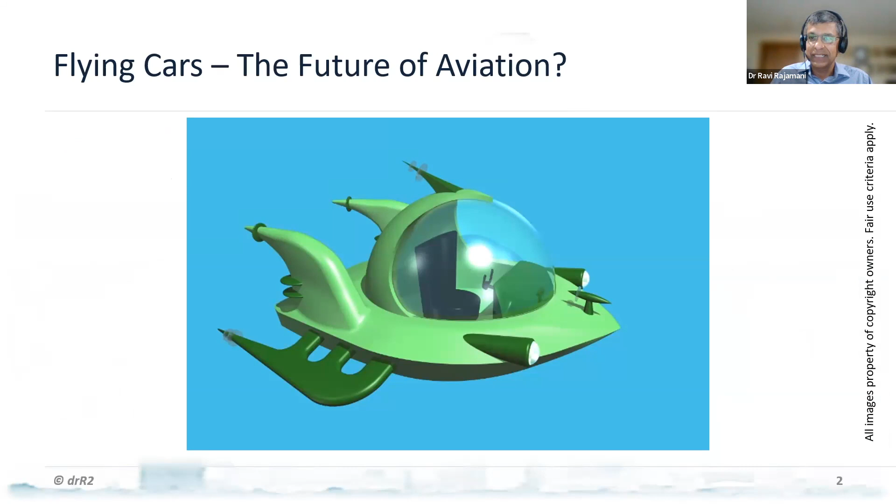Okay, I'm going to talk about electric propulsion and give you a brief history of it, and some of its technical challenges. More than anything else, I don't know if you have seen the Jetsons - it's obviously an American cartoon from way back when, and they had this personal flying machine for everybody there. I don't know how they did the propulsion there, but there are people within America and elsewhere too who have been trying to figure this thing out.

Let me show you a little video.

So this is what people have been working on at one end of the spectrum. I'm only talking manned flight today. I'm not talking about drones, electric drones. There have been many such vehicles being developed all over the world, including in India.

Manned is a little different. There have been some jetpacks. I know you've seen the ones, the French people in Dubai, and they've been trying that. Unfortunately, the lead pilot got killed a couple of years ago. So there have been some accidents, including with electric aircraft propulsion in China. There have been some real bad accidents.

However, within manned flight, at one end you have personal aircraft, and at the other end you have companies like Archer and Joby and Lilium, etc., that are developing, I'm sorry, they're developing passenger-oriented electric aircraft. So I got this recently.

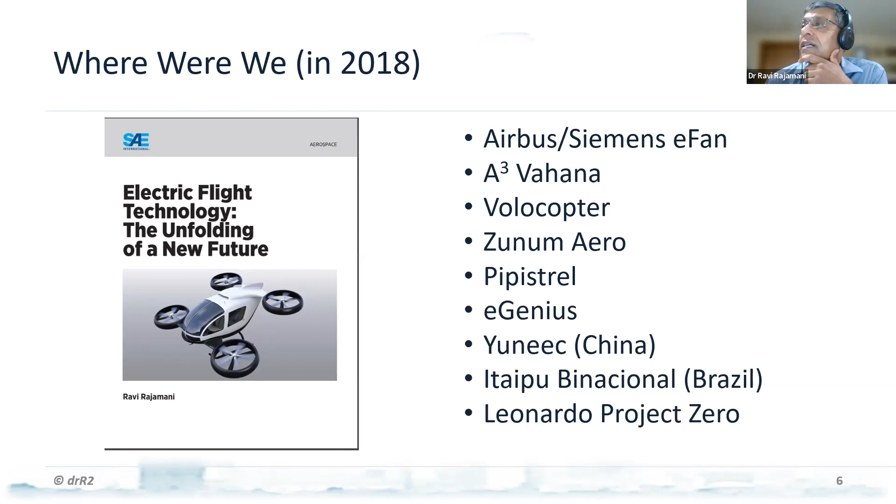There was a company called Itaipu Binacional in Brazil that was developing an electric aircraft, and then Leonardo, which was AgustaWestland, had a project of essentially a helicopter powered by electricity. Today, I believe only Volocopter and Pipistrel are left in that lot. Now, clearly Airbus is doing other things, and Zunum has gone out of business.

Leonardo has teamed up with another company, I believe, to work on something. However, a lot of the programs we saw 5-6 years back have gone by the wayside.

Why is this a problem? There are many hurdles to the adoption of electric propulsion. The aerospace industry is very mature in one way. It's extremely risk averse. It's very safety conscious. So system certification is a big deal for us.

And electric propulsion brings in many new technologies, especially related to energy storage, reserve energy, the kind of control surfaces, the way you do the controls, etc., which brings up many technical issues. And that's one of the reasons why it is kind of tough.

Also, a lot of these aircraft are transitional aircraft. In other words, they go from vertical flight to horizontal flight using propulsion systems that change their configuration. And that requires not only certification, but it also brings up operator certification problems. There aren't civilian pilots who know how to fly these kinds of hybrid aircraft. So the FAA is struggling with trying to get operator certification.

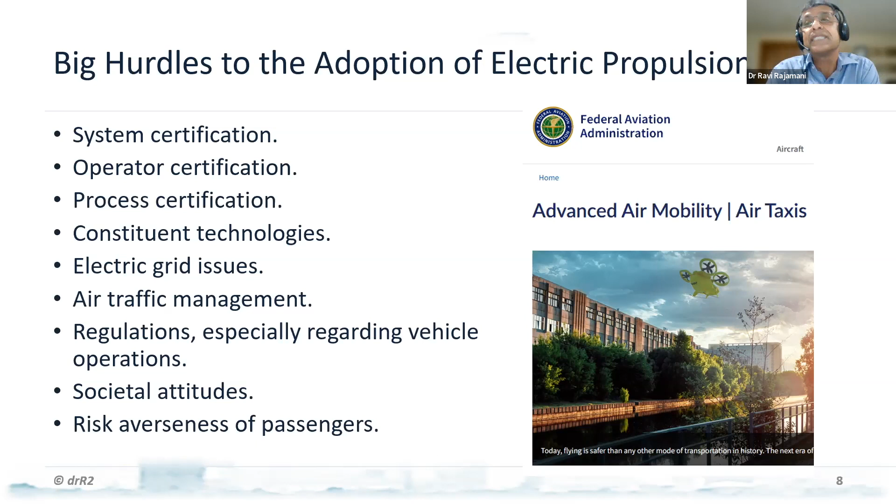And risk averseness of passengers as well. Do you really want to get into an aircraft which is so newfangled and technologically advanced? That's a question that I guess each one of us has to answer for ourselves. Well, when did it all start? Electric propulsion. Does anybody have a clue? I know this is not a question and answer kind of a thing, so I'll just bang right on to it.

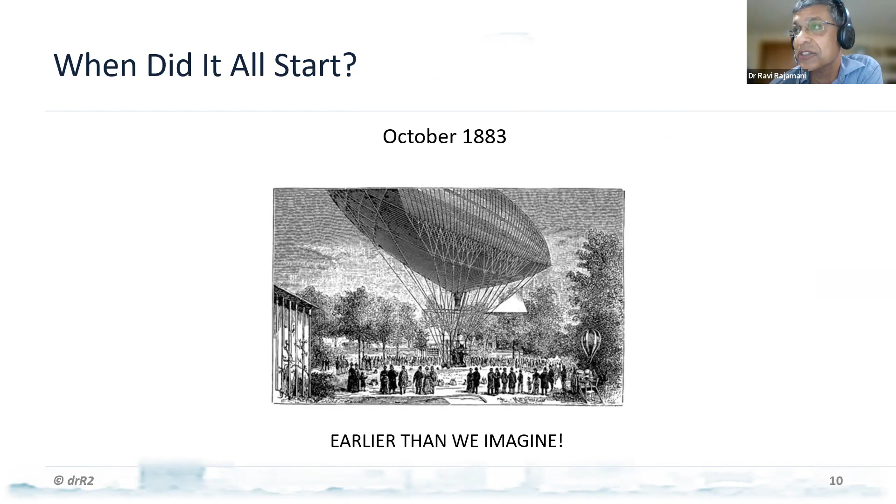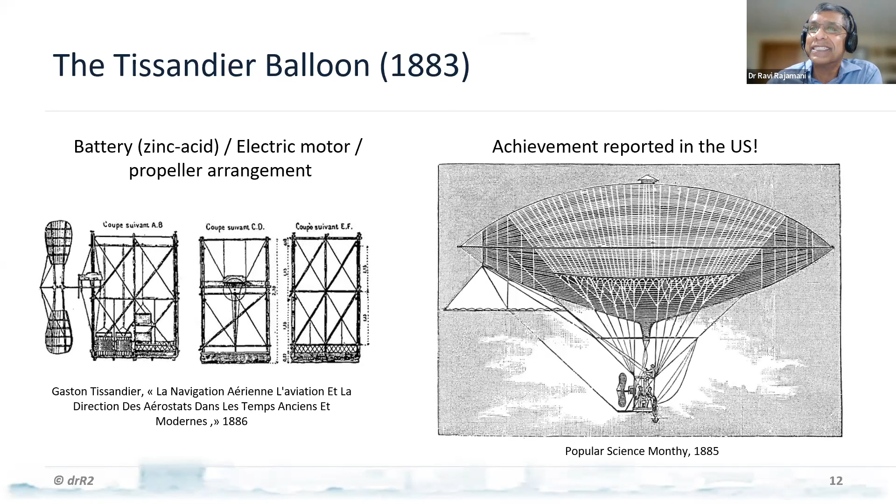You won't believe it. 1883 is when the first aircraft with electric propulsion actually got off the ground. Of course, it got off the ground because it was lighter than air, but still, the point is that it had many of the elements that we see today in an all-electric aircraft. It had a battery, it had an electric motor, believe it or not, by Siemens. Siemens was there since that time. And it had a propeller designed by these brothers who flew this right outside Paris in 1883. It was reported in the US about 2 years later. They didn't have internet then.

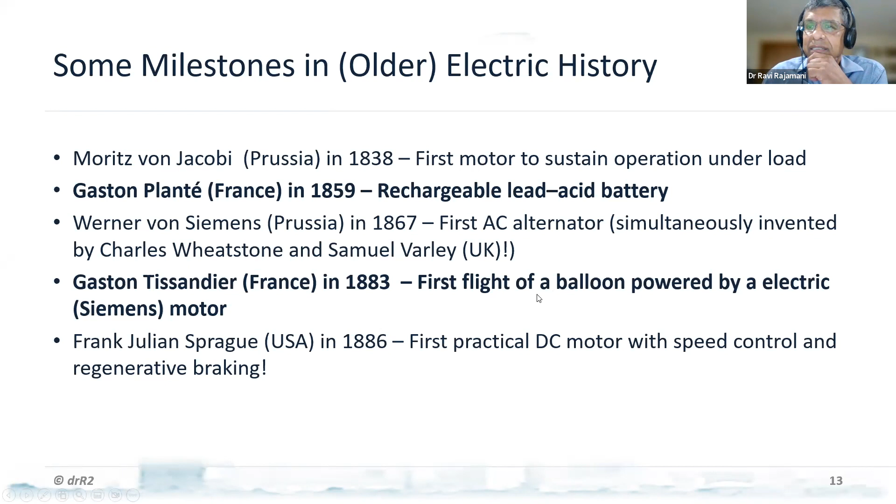Some of the key milestones in electric history, I don't want to belabor this too much, but rechargeable lead acid battery, 1859. There was Siemens, 1867, first AC alternator. And then you had obviously the motors themselves, which were used in this flight. So these things are fairly old. That was the only point I was trying to make. However, that was lighter than air.

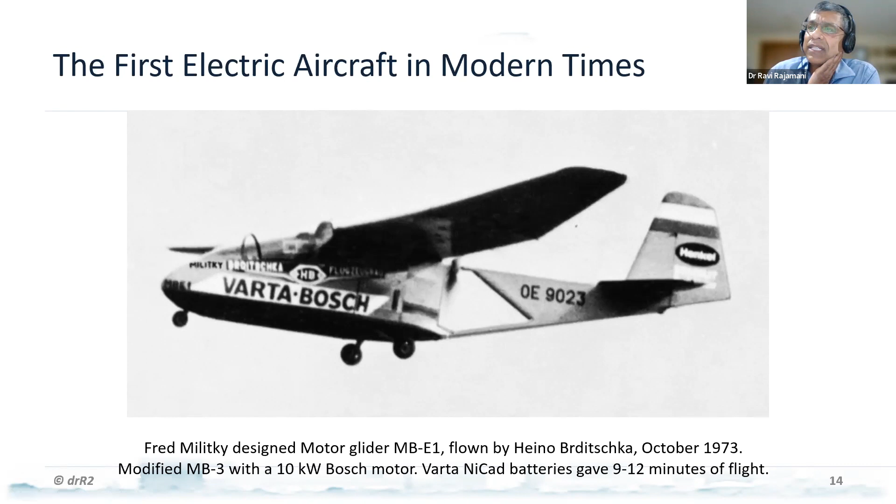When was the first electric aircraft in modern time? That was in 1973, interestingly, also in October. This was a modified glider, what they call a motor glider, in Vienna, in Austria. And this, believe it or not, thanks to YouTube, is a recording of the very first flight. It's amazing what you can get on YouTube these days. It's about 30 seconds. We'll just watch this.

As you can see, it's a pusher prop. They essentially took the IC engine and replaced it with a motor and batteries. I think it was like 9 minutes or 12 minutes total flight time. And this was right outside Vienna, the airport called Wels. And that was the very first heavier than air electric flight which was recorded.

Okay, then, believe it or not, after '73, a lot of time was, I wouldn't say wasted, but at least diverted from actual battery-powered all-electric aircraft to solar. Not that solar itself can do much. I've done some calculations, and solar really is not particularly good for flight, except for some novel things like the Solar Impulse, which took a couple of people around the world.

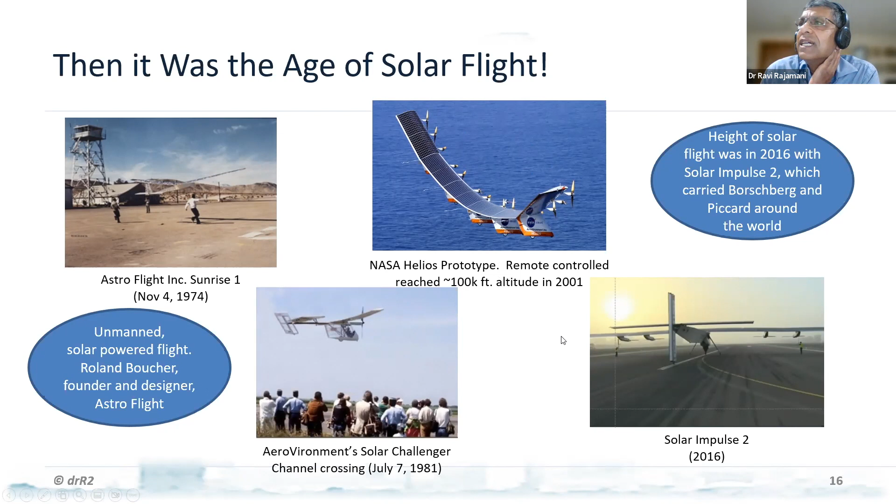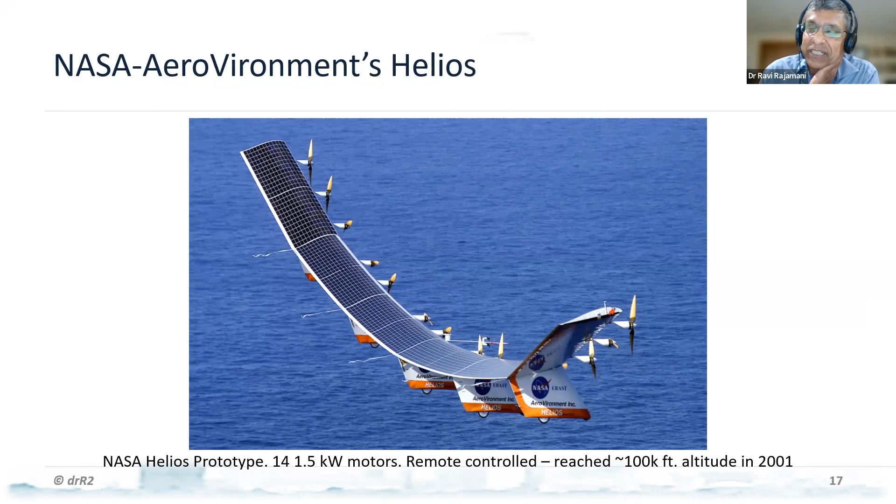And this is a very interesting aircraft, the NASA Helios prototype. The only reason I highlight it here is because it is essentially just a flying wing. It is a huge, massive wing made of solar cells, which powered these 14 tiny motors, and it reached a height of 100,000 feet. 100,000 feet has been in the news lately because of this Chinese balloon that was shot down in America last month.

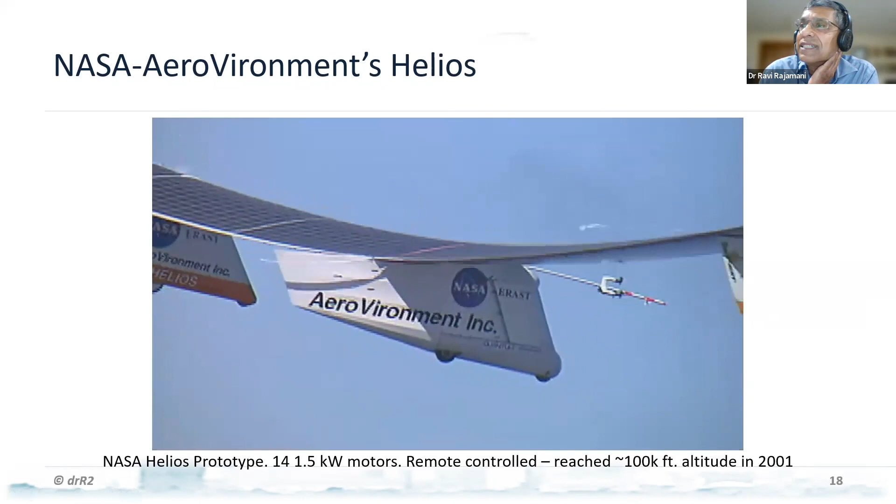So here is a small clip of this thing taking its test flight over Hawaii. This was in 2001, I believe, 2003.

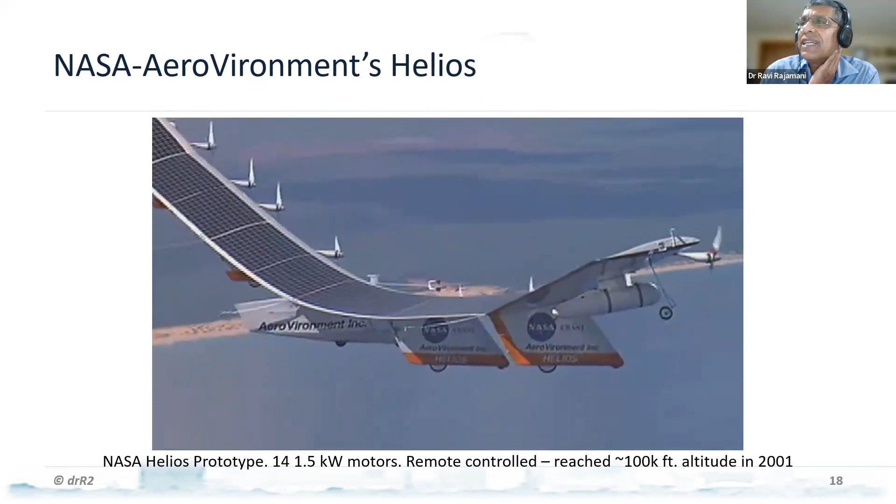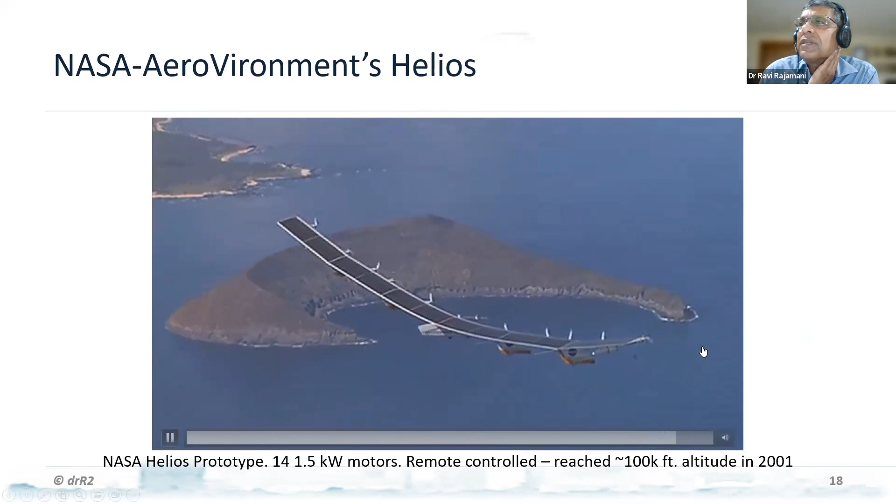I'm sorry, this was in 2003. And we'll just wait for this to end, which is now. And then, unfortunately, what happened was right after this flight in end of June, it crashed, somewhere around Hawaii. So that was rather sad, but it reached 100,000 feet, which is not something that normal aircraft do.

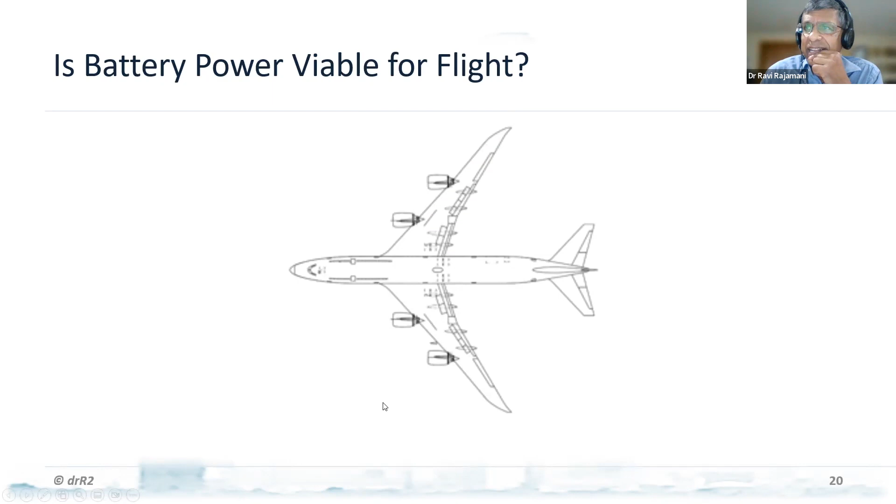Is battery power? So the question then is, solar is certainly not something that is viable for any serious air travel. It's fine for reconnaissance, which is what the Helios was supposed to be. Reconnaissance aircraft, something that can stay up in the air forever, basically. So solar is out. Is battery power viable for flight, a serious flight? Let's do a little calculation.

If you take a Boeing 747, it has 4 turbofans. I've just made some back of the envelope calculations. I may be off by a little, but it's not by too much. So a total of, let's say, about 100 megawatts to take off and climb. If I make a calculation for a 30-minute flight, the amount of energy that's needed, taking the best batteries today of about 220 watt-hour per kilogram as the specific energy.

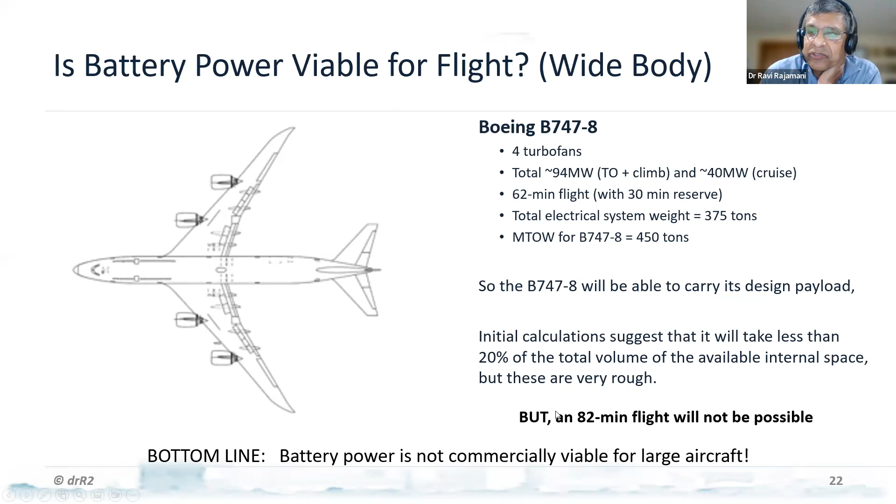If I look at that, a 62-minute flight with a 30-minute reserve, a 747 will be able to do it. And in fact, the electric system will pretty much take up the entire takeoff weight of this aircraft, which essentially means that it won't have any leeway in terms of weight for any people, any payload at all. An 82-minute flight will not be possible. Battery power essentially is not commercially viable. If I take this entire big 747 and all I can carry are probably a few tons, it's not worth it.

If I do the same thing for a narrow body, I could probably do a 70-minute flight with no extra payload, but anything above that is out of the question. Again, these are my back of the envelope calculations. You can certainly argue with these and come up with your own. But the point I'm trying to make is battery power is not commercially viable for a large aircraft. It is fine for small aircraft, Part 23 aircraft, but not for a large aircraft.

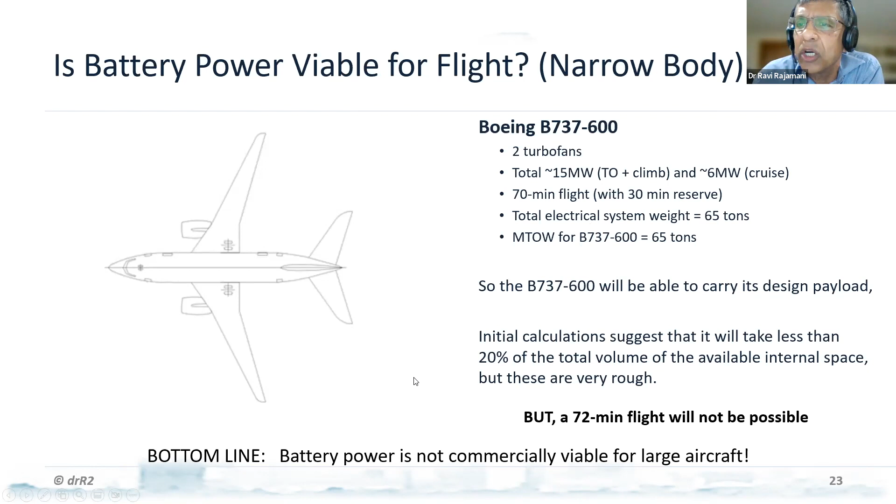So what is, I guess, possible with today's technology? All electric battery power flight, far fewer than 10 passengers, in my opinion, maybe about 100 kilometers. There are claims, let's say by Lilium, that they can go 400 to 600 kilometers. I have to see it to believe it. Maybe about half an hour, because the FAA requires half an hour of reserve fuel for emergency.

Hydrogen fuel, that's a really interesting prospect. There are things going on in that area, which I'll talk a little more about. That, I believe, can carry more. There have been some tests recently that seem to suggest that you can do better with fuel cell and hydrogen, but there are all kinds of other problems with hydrogen. We'll go into that. But hybrid electric was what I thought would be much better. But one of the companies that had a good idea, which was Zunum in Seattle, went belly up recently.

So it's interesting. Performance is more efficient than conventional because of the sizing issues. In other words, you can make the gas turbine that actually drives the generator much smaller and much faster, and you can get more efficiencies that way. Other than that, there are no braking efficiencies, no coasting efficiency, nothing like that in the air. So the Boeing 787 claims a 3% higher efficiency using more electric components.

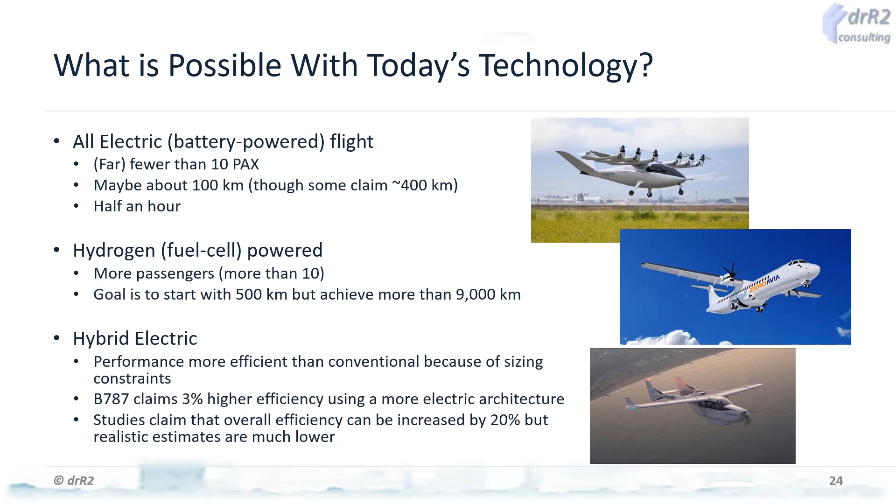Okay, so where are the technologies today and where do they need to be? The motors and generators: today, our specific power densities are in the range of 5 kilowatts per kilogram. There have been certain announcements from Siemens about closer to 10 kilowatts per kilogram. MagniX is, I think, in that range too. According to some calculations, especially from NASA Glenn Research Center, they did some studies. They have an entire big lab in Sandusky called NEAT, which is testing out all these technologies. They claim that 13 kilowatts per kilogram and above is needed for viable electric flight.

Power electronics: we are around 13 kilowatts per kilogram densities, and we need something greater than 25. Ohio State and others have claimed that they can get there. Virginia Tech in the US is working on this as well.

I'm now drawing a blank on the famous university in the UK that's also very, very good at this. Sheffield? I don't know, maybe one of you knows. And they also claim that they have technologies at that range, 25 and above. So we're getting there. The biggest problem, of course, as all of you know, and you have even mentioned, is power storage.

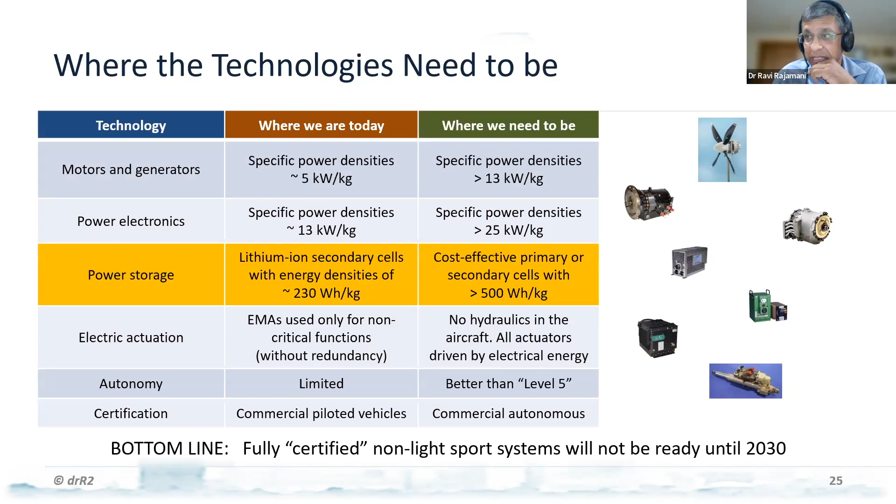And certification, we'll talk a lot about that in the video, but that is a huge problem. A lot of the electric aircraft companies think that they can do this easily, but it is going to be difficult, especially with all the new technologies that they are bringing up. Now, Pipistrel is a company that has certified an electric aircraft. However, it's in the light sport category, which is almost experimental. So I wouldn't really call that certification. Certification is a complicated affair. It's not just the product, which is the central thing. Yes, aircraft engines, propellers, etc., have to be certified in and of themselves; their design has to be certified. However, from design to actual reality are the processes, the manufacturing processes, the software development processes, even the airspace in which they operate; all that has to be certified and regulated.

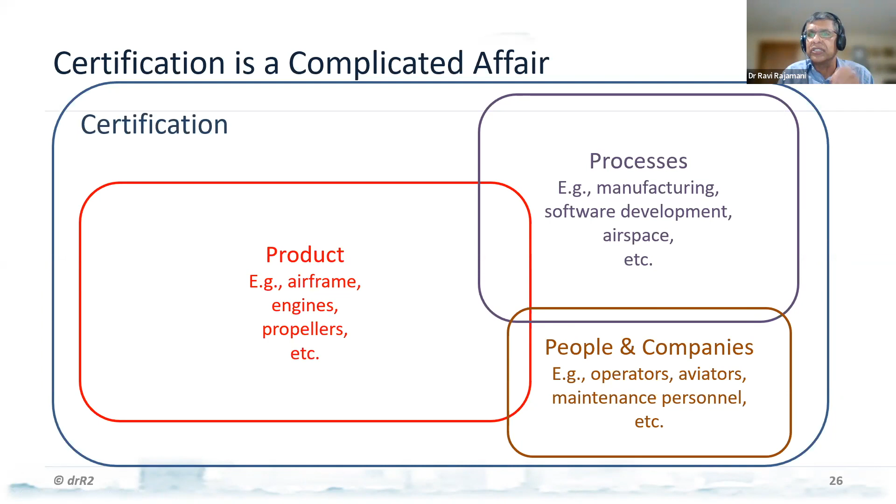Not just that, there is a third aspect to it, which is the people and the company. In other words, the manufacturing, the operators, the aviators, the maintenance personnel, all of them have to be certified to be able to work on this thing. Airworthiness is not just how the design of the aircraft is. It is also what is known as continued airworthiness. How do you maintain it? A perfectly good aircraft can be spoiled very easily if you don't maintain it properly. So this is actually quite a complicated three-pronged system that all needs to work together for this to be viable. So, different aspects of these challenges. There are obviously the systems on board, the energy storage, which we talked about, the power electronics.

There are obviously power electronics on aircraft today. There is energy storage on aircraft today, there is distribution on aircraft today. However, they're all at very low voltages, less than 1,000 volts, and relatively low amperage. So the amount of power being transferred is mostly for control surfaces, etc., not for propulsion. And that's a huge deal. So there is a lot of work to be done in that area, the entire power generation, power storage, power distribution within the aircraft.

Is it going to be DC power? Is it going to be AC power? Even those things haven't been decided. Typically what people are saying is it might be AC power for the actual motors - in other words, you will have inverters. However, you'll have DC power for the transmission, because that allows very high voltage and relatively low current, so that you can actually have manageable wire sizes, etc.

There are, along with all this, novel failure mechanisms. Everything about certification is how things fail and how do you recover from failure, or how do you mitigate that failure. That's really all new in electric aircraft.

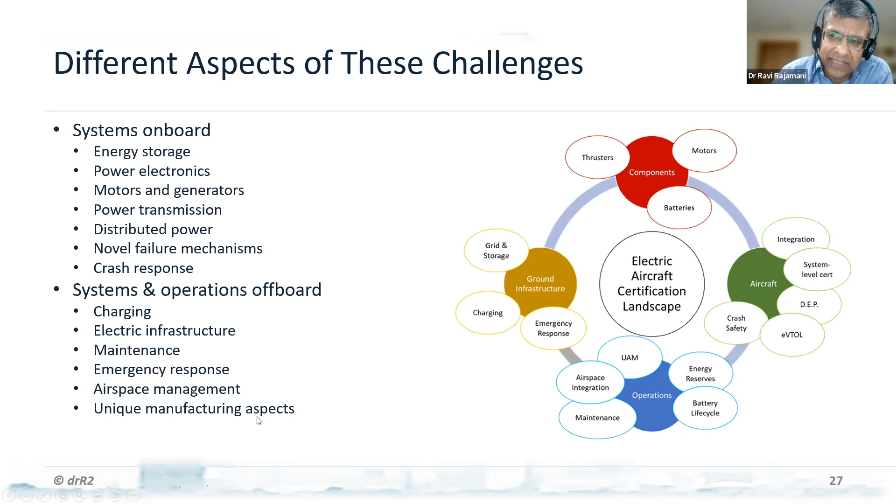We talked about emerging airspace management. If they have so many aircraft - manned aircraft, air taxis, urban air mobility, drones, your Amazon dropping off packages using little drones - can that all be sustainable in the airspace? The sky is vast, but can it all work without them running into each other? There's all kinds of issues, and I think NASA, especially Ames Research Center, has a huge program trying to develop the next generation air traffic management system.

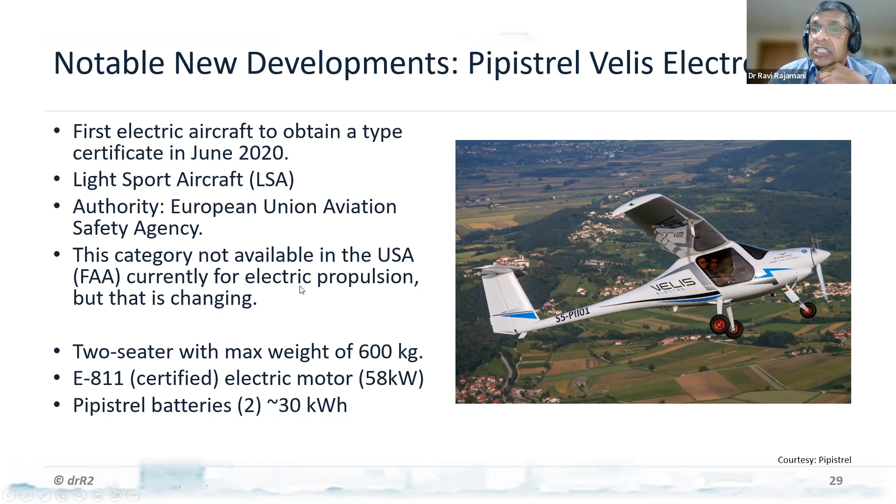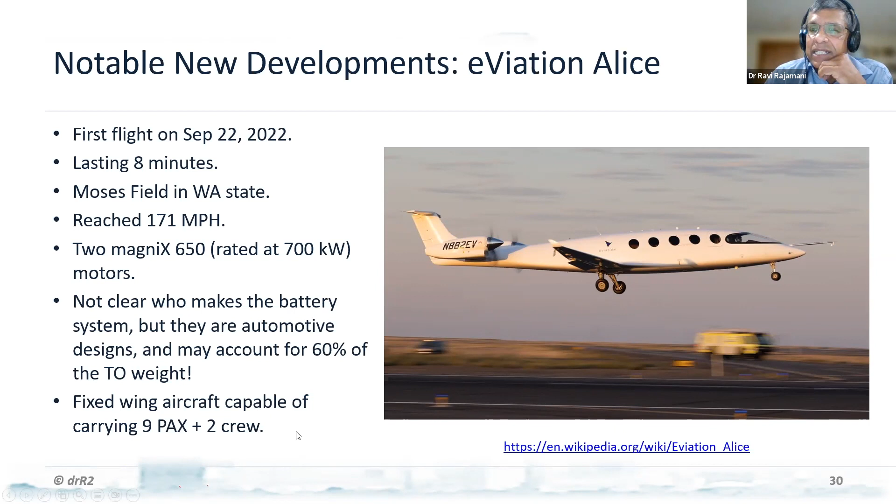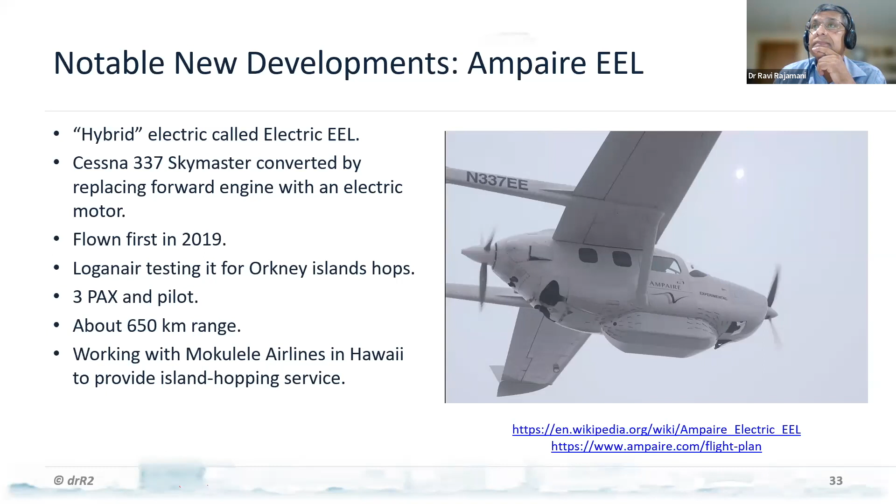Okay, so there was one question that has come up time and again: is hydrogen the answer to the range issue and business viability issue of electric aircraft? I'm talking not about hydrogen being burnt in a gas turbine, which is another way you can use hydrogen. I'm talking about hydrogen being used in a fuel cell, which is the more popular way, even for automotive systems.

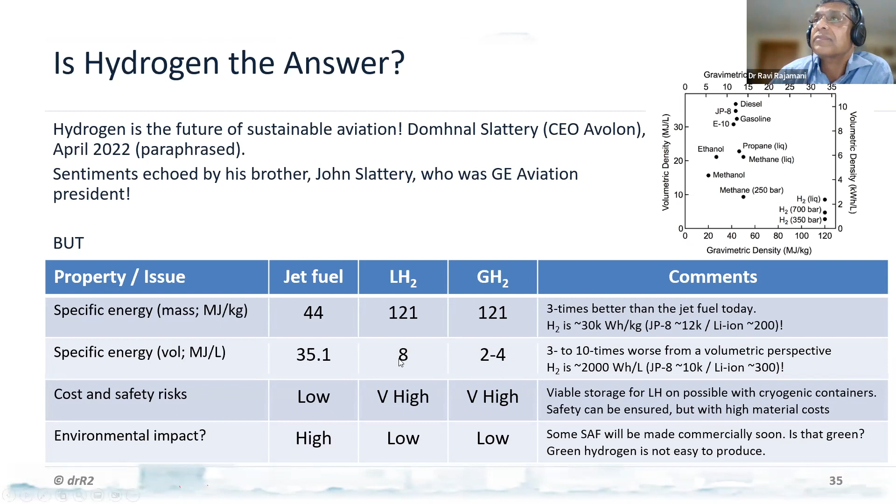However, maybe because of that, there's a lot of incentive from the DOE and others to develop hydrogen infrastructure in the US. In Europe, especially in the North Sea area, they're doing a lot in that. And I believe I heard even India is doing a lot, though I don't know much about it.

But there are 3 or 4 companies in the world that are trying to develop hydrogen-based aircraft. Universal Hydrogen, which I want to point out, because the CTO who started this was the ex-CTO of UTC, Paul Eremenko. He was a DARPA guy. I knew him when I was working a DARPA program many years back. He developed a way of storing gaseous hydrogen, but now I think they've gone on to become more vertically integrated. They're working with magniX to develop their motors.

They're working with Plug Power for the fuel cell, and they have got a Dash 8 that they've now got permission to actually fly later this year. ZeroAvia has modified the Dornier 228, changing one of the engines to hydrogen powered. They are advanced in that. H2Fly, which is a DLR spin-off from Germany, a research lab, has modified the Pipistrel Taurus, the one with two fuselages and a center engine, and converted it to a hydrogen fuel cell vehicle.

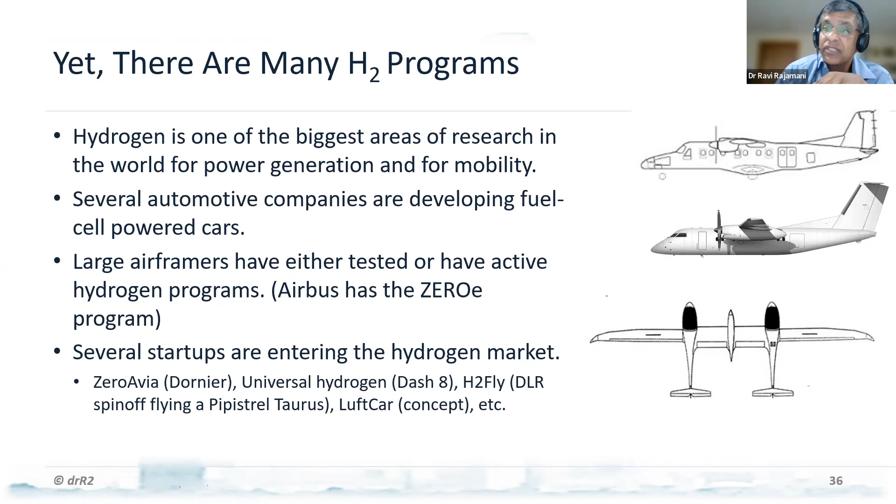And then there is a local company here that I've been involved with that is trying to develop a hydrogen-based concept vehicle.

So ZeroAvia, I talked about this. First flight was just earlier this year in the UK. They were a California company, but the UK has been giving them some incentives, so they moved there. They've done about a 600 kilowatt system. They're trying to develop a 2.5 megawatt system. So that's a good thing.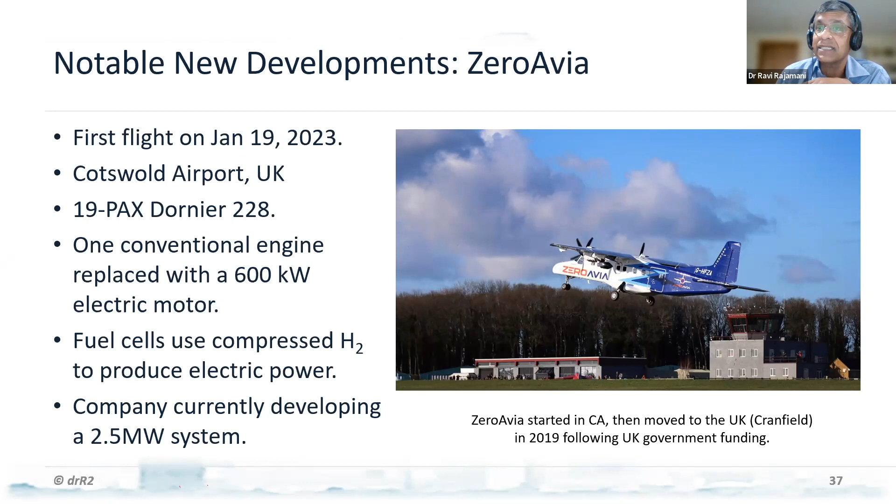Okay, but we talked a little about the business viability of this thing. So there was this article by my friend Kevin Michaels late last year, the opinion "There Will Be Blood: Dissecting the eVTOL Business Model." He basically said that it's going to be impossible to do. It's really, really very difficult. His bottom line was he doesn't know what these air taxi companies were smoking.

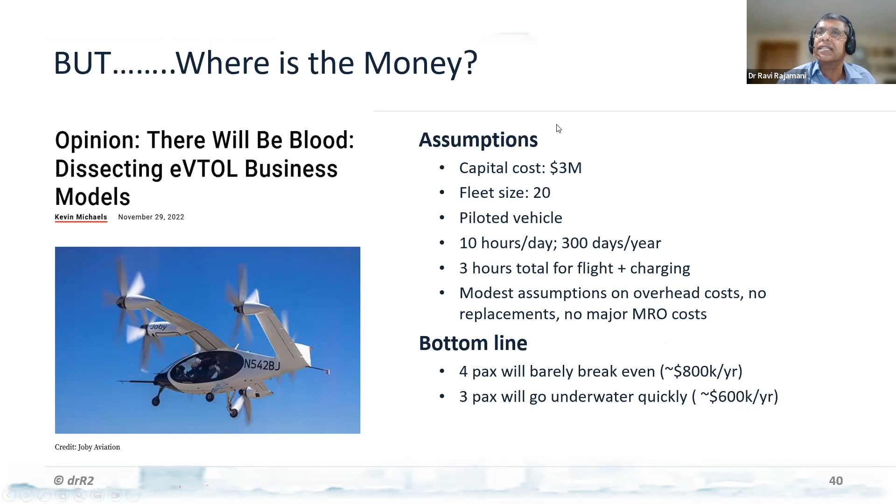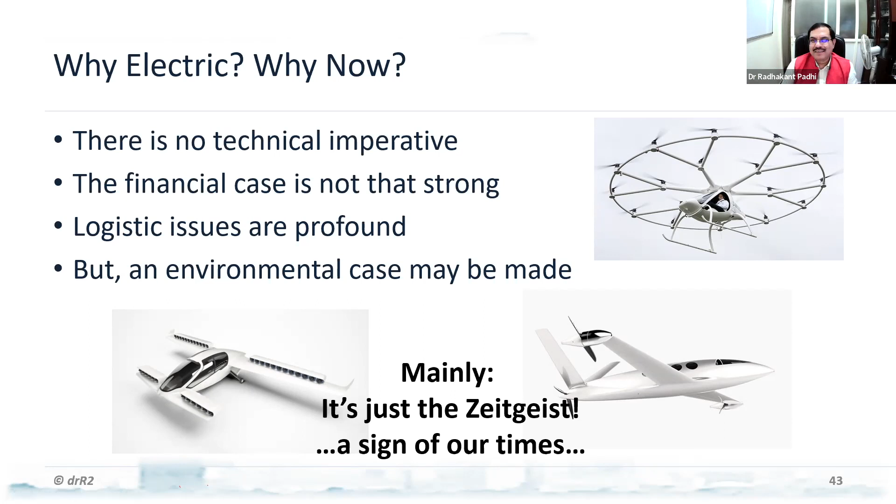And also probably you do all your own calculations to conclusively claim certain things, which requires a lot of effort for doing all this basically. They may all be wrong though. Not really, not necessarily. It's all kinds of assumptions. You can make anything work anyway. But I think I've made some reasonable assumptions.